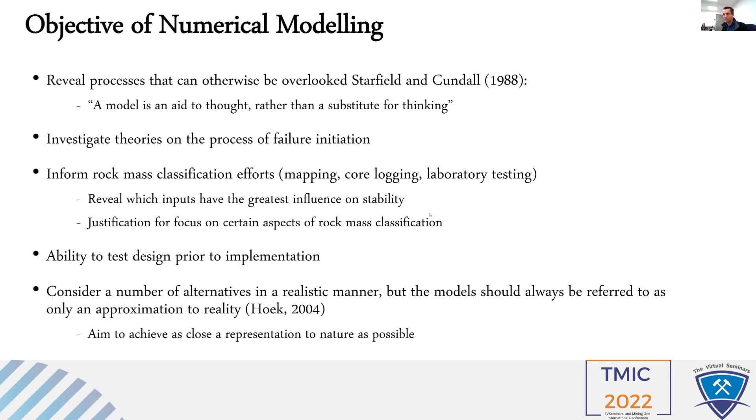You can reveal, using sensitivity analysis, which inputs have the greatest influence, and you can then justify the focus for certain aspects of rock mass classification. And it really does allow you to test the design prior to implementing. One of the quotes from Hoek is quite good, that it should always be referred to as an approximation to reality, but what's key is that it needs to be as close a representation to nature as possible. So make sure you haven't got too much fudge in there.

So we've heard a bit about the economics. These are a couple of simple images to show the main impacts on an open pit. If you have a larger footprint of the mine, you have a significant increase in the stripping ratio, and in the case that Gary presented, if you've got a step out in the base or in the wall, then you have a decrease in recovery with sterilized ore.

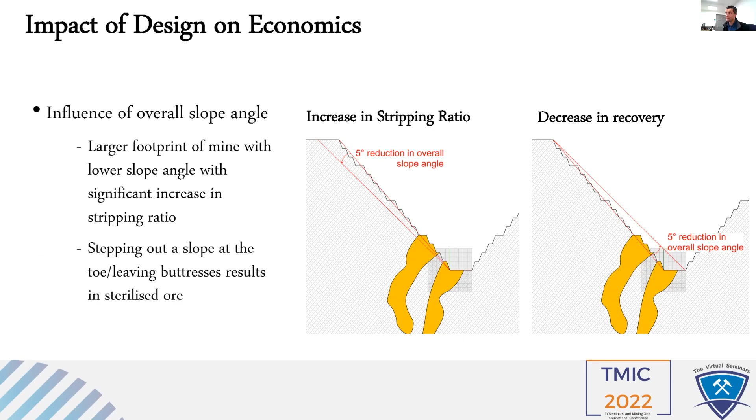Continuum and discontinuum approaches. It's generally widely accepted that there are three scales of study when you look at slopes. The small scale tends to be discontinuity controlled, and at medium and large scale you tend towards a more mass or continuum controlled behavior, which is the complex interaction between rock strength and the fracture network, so incipient joints and bedding. Another name for this mass controlled behavior is equivalent continuum.

An example of an equivalent continuum approach is the synthetic rock mass technique, which Itasca use. That's where you're directly calculating the scale effect. This graph shows that scale effect going from your intact strength right down to what your rock mass strength will be at an overall scale.

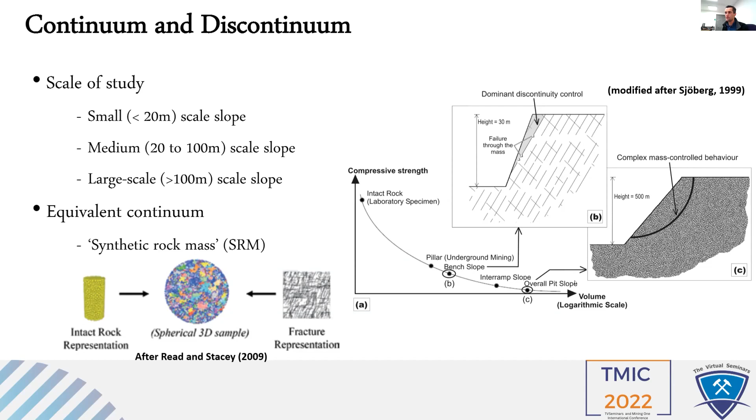So there are three levels of sophistication when it comes to modeling. You start with limit equilibrium or kinematic techniques, and the second and third techniques are what I refer to as numerical modeling. A lot of people consider limit equilibrium as numerical modeling as well, but I think numerical modeling should be kept for approaches which are mesh based and resolve stress, strain, and plasticity. Whereas in limit equilibrium, you're essentially resolving the driving and resisting forces, whether a slope is in equilibrium or not.

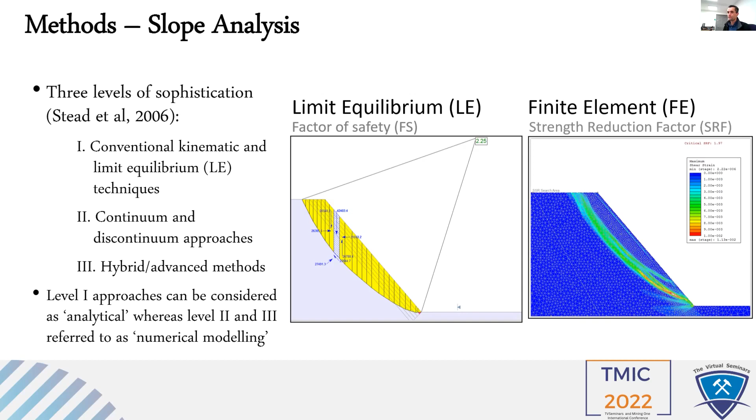Okay, the rock mass strength criteria is particularly important when you're considering that larger scale. I think it's very widely accepted that we use the Hoek-Brown strength criteria, and that reflects pre-peak, pre-yield strength very well, but it doesn't consider any post-peak strength.

I'll just set this little video playing here. This is something that Abu had in one of his talks actually that I quite liked. It really does show that pre-peak behavior quite nicely. So you have the elastic. This is a spring, if you like. So it shows the elastic recoverable straining on the spring once you get up to this first point, and then beyond this, you're entering the plastic realm, and going past your yield point is particularly important in rock masses.

And I think in all large open pits there is some degree of movement and closure, and that's a natural response to mining. But I think in mining, which is different to civil, we do tend to be closer to that yield point. So I think the rock mass behavior is mostly beyond that yield point. We are looking at conditions which are quite complex. So having a constitutive model that actually represents the rock mass strength beyond the yield point is particularly important.

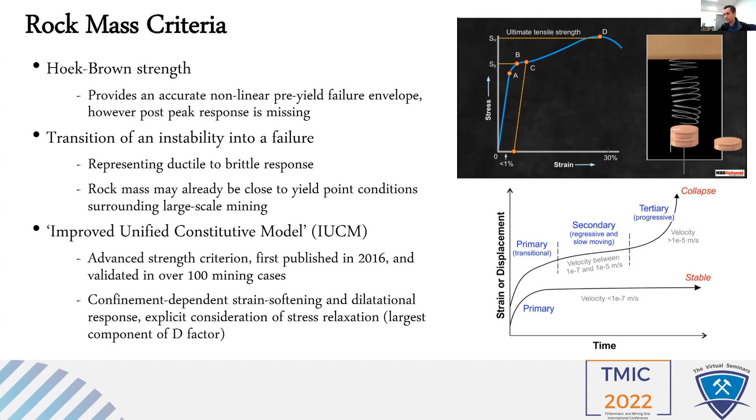Okay, this slide here just talks about the importance of understanding the complexity of rock mass. We've briefly heard Gary mention anisotropy. And this is actually often overlooked. It should be considered separate to GSI. When you have a very highly anisotropic rock mass, you can consider the rock to be quite complex. In this case here, you've got a high GSI and quite a high mi. But a more conventional approach, say limit equilibrium, can't capture that complexity. So using a more robust solution is important.

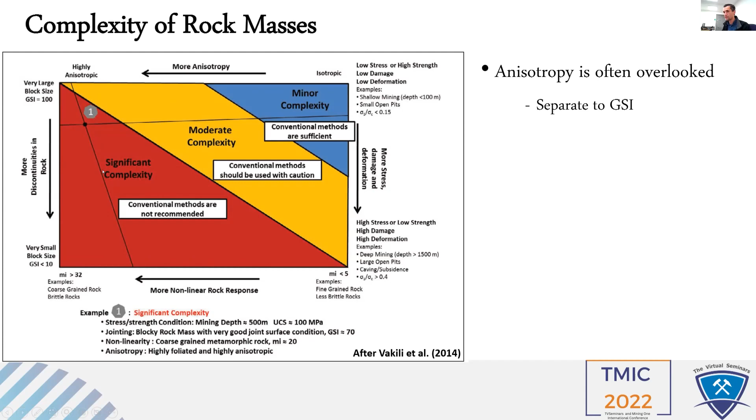There's 3 minutes left, Tom. Sorry to interrupt. Okay. Thank you.

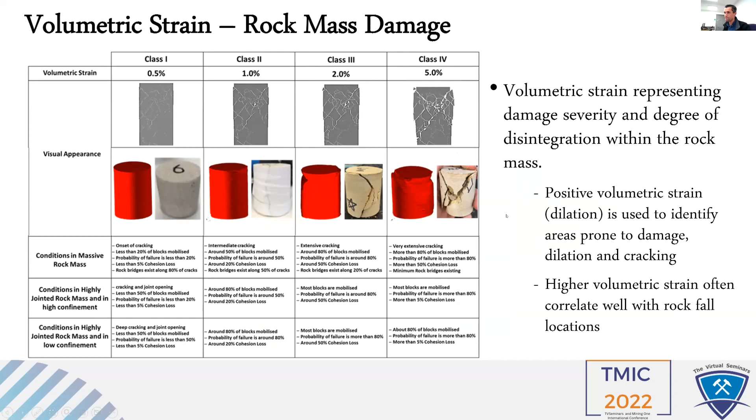I'll just skip through these a little bit quicker. So the volumetric strain is a way that we can quantify rock mass damage. And in open pits, this is particularly important because higher volumetric strain correlates well with different rockfall locations. The tool that we've mentioned, SlopeX, uses the FLAC3D solver, which is long recognized as a robust solver, but it makes it accessible. So you can run many design iterations, and it links in with the improved unified constitutive model.

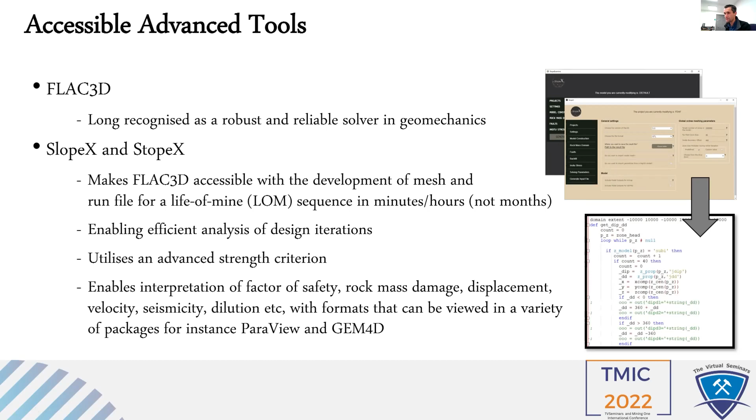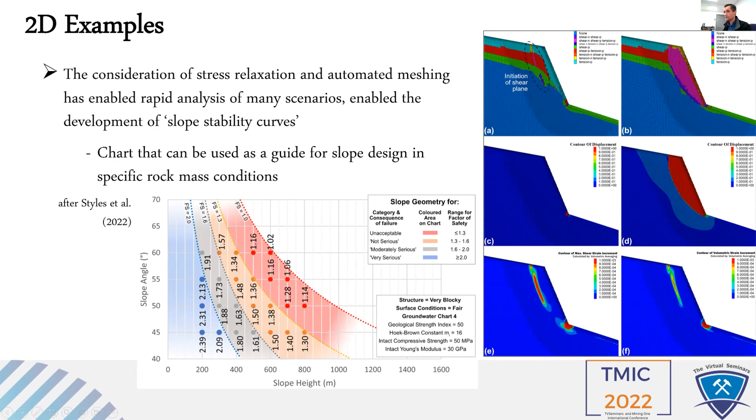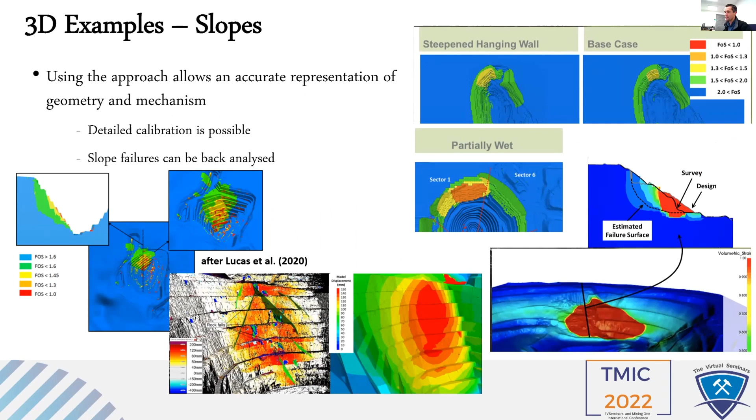Just 1 minute, Tom. Yep.

So in summary, extractive companies are becoming more and more aware of their social license to operate, and there's some important stakeholder engagement. If you have a large slope failure, not only is it hazardous, but it's also bad for public image. So using the most advanced tools to provide the most realistic solution is getting more and more important.

I've talked briefly about the different methods, and I think capturing that complex ground condition and representing it effectively is very important. Being able to investigate instability efficiently and test designs prior to implementation is paramount. So that's all I've got, actually.